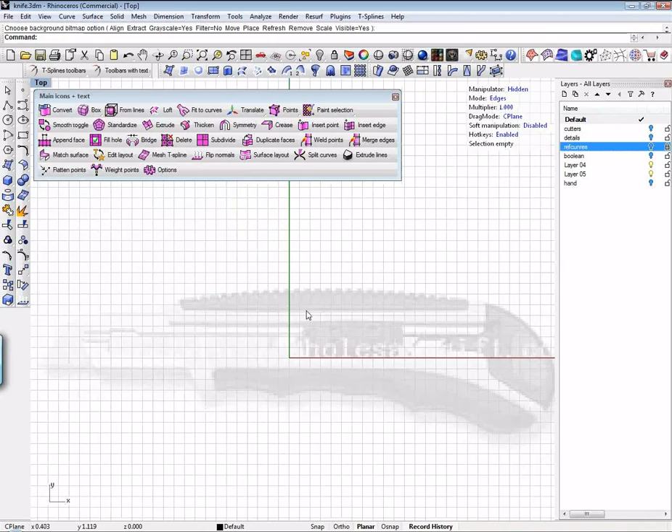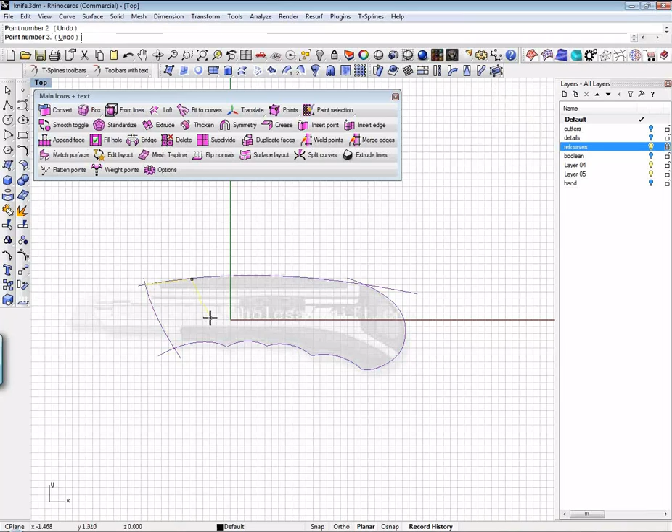So I downloaded this image of a utility knife off the web, and I built some reference curves. These are just basic Rhino reference curves, to give me a visual cue of what I want to build. The last couple of tools I want to show you is this append face tool.

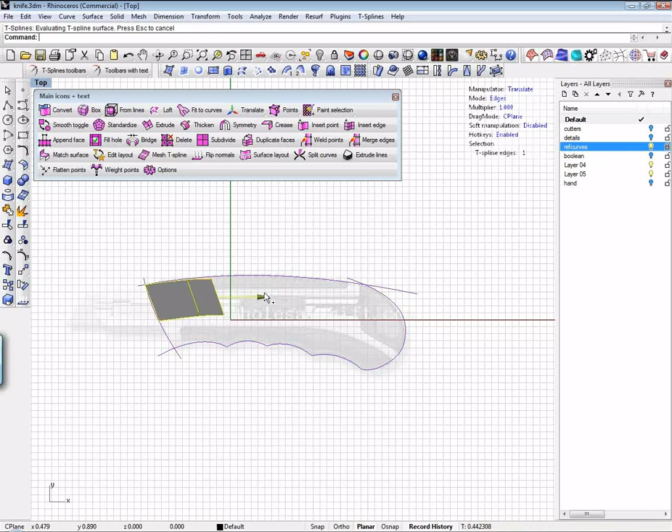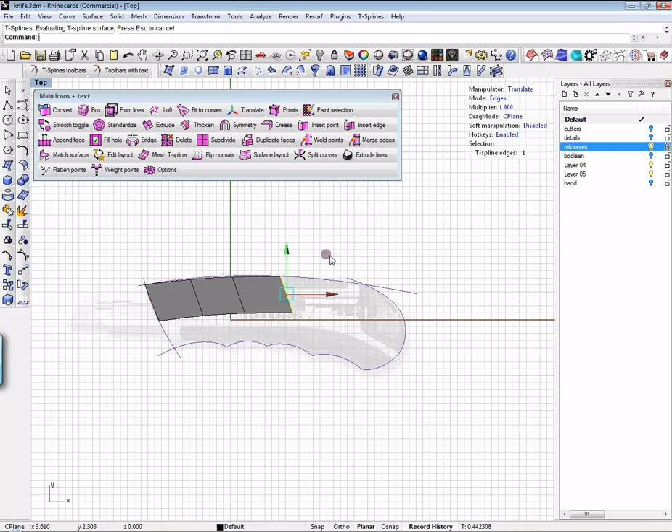What this allows you to do is make a four-sided single face. Pick three corners and right-click, and it'll make a face. Now, using that Alt-Drag workflow, I can set my mode to edges up here, pick this edge, bring up my translate manipulator, and Alt-Drag this edge out. If I want to use this disk, I can interactively drag it around, knowing that it's stuck to the C-plane, and start dragging this thing out.

Now notice I'm going to line up these things with my detail bits, and I'm not doing a very good job of that right now, but I'll go back to my verts mode and drag these around a little bit. Again, this is nothing complicated, just moving points around. Anybody who's worked in Illustrator or done any NURBS work will be okay with this.

I'm going to go a little bit past my endpoint here. Actually, I might add one more at the end of this. So I've got here, I'm going here, move this guy out of edge mode, move this guy out a little bit, go to my verts mode, straighten that out so it kind of flows nicely, how you'd expect that handle to flow.

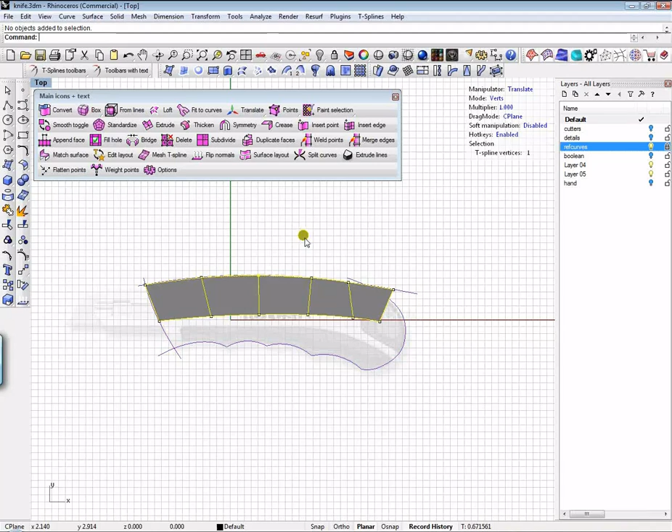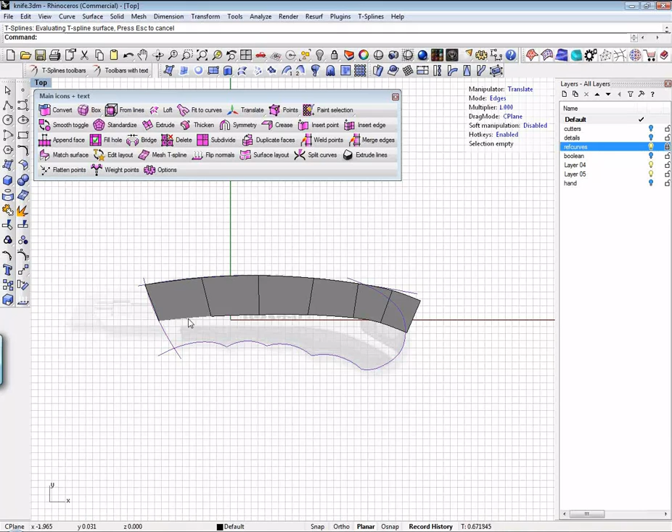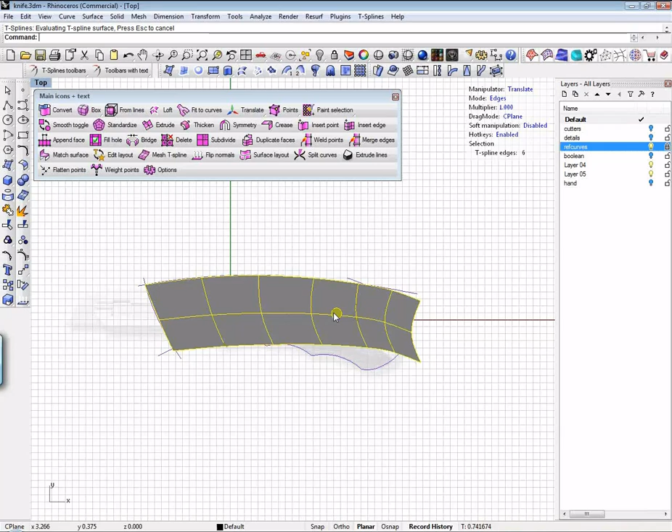Then I'm going to go to edge mode and pull out one more edge. So I've got one line here. There's going to be a little bit of curvature in this model, so I want a detail line going down the center. I'm going to grab this entire curve line by double-clicking the edge line, and then Alt-drag this whole thing down. I'm not being terribly particular about where this goes because I can always adjust it later. Let me turn the shading off so you can see what's going on here.

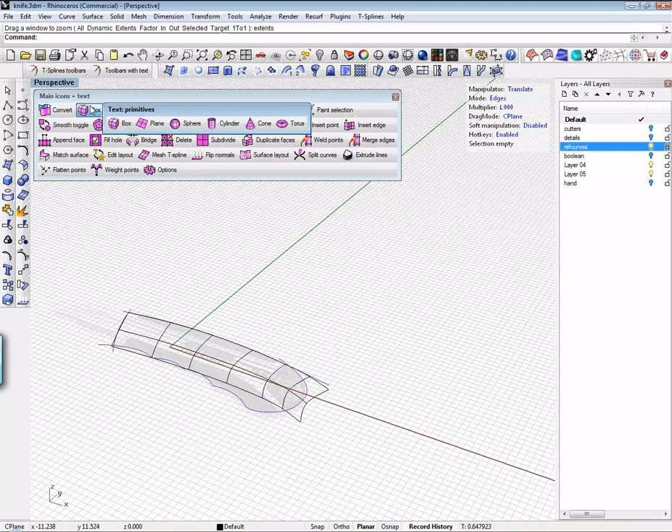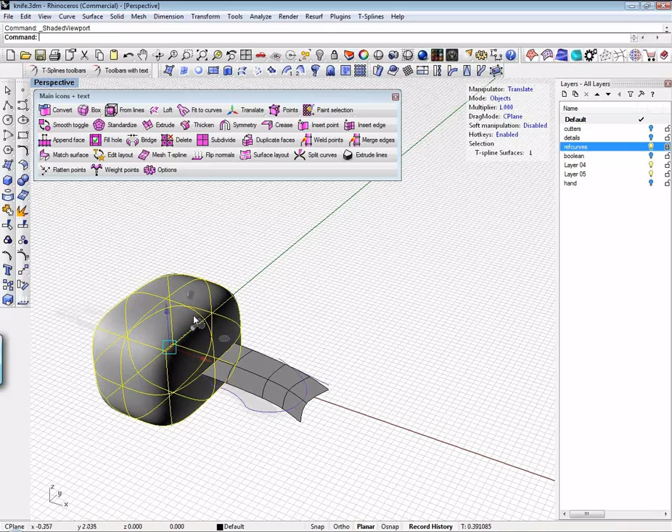Now you'll notice that I've got nice smooth lines here, and this would be a good time to talk about the difference between smooth mode and box mode. There's two ways that T-Splines objects are displayed. There's smooth mode, which is here. Okay, this is what the smooth T-Splines objects look like.

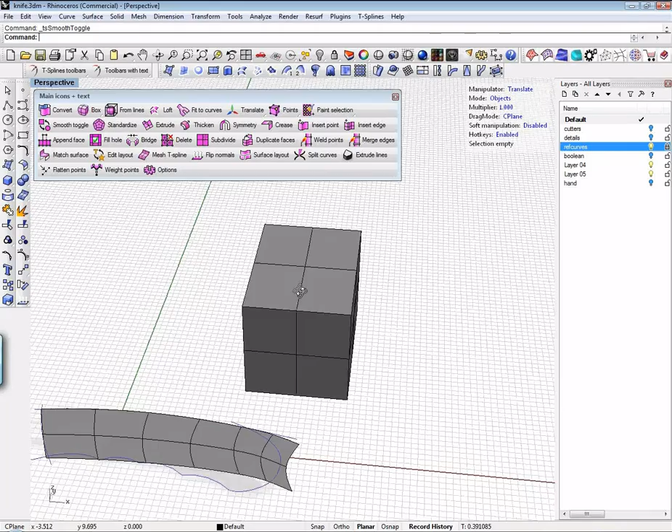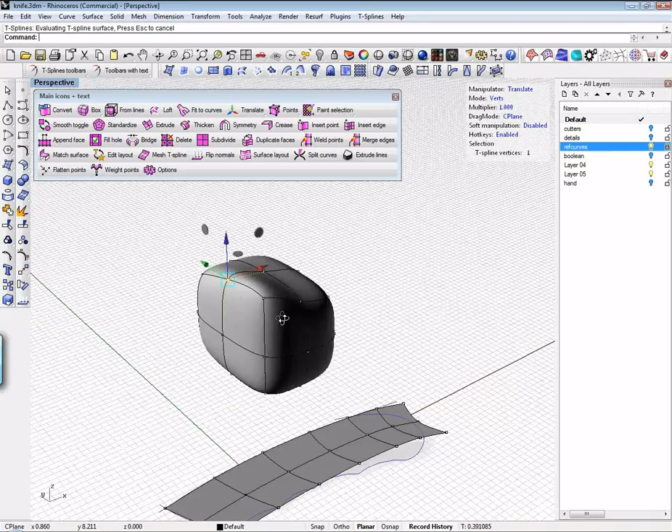And if I do smooth toggle up here, you'll see that it converts to box mode. This allows me to see what the polygonal control cage of this object is. The easiest way I can describe this is imagine that there's a smooth object trapped inside this box. And as I move objects on the box, when I convert back to smooth mode, it modifies my smooth object.

So in this case, let me get rid of this. I'm going to convert this to box mode because it's a little bit easier to lay out, and I'm just going to drag my points around so that they're laying out about where I want them to lay out.

And I've added an extra detail line here that I don't think I need. So I'm going to go to my edges, pick it, and delete it. You'll notice that it disappears. If I go back to my vert mode, I can then pull this around. And I've got a basic approximation of my knife.

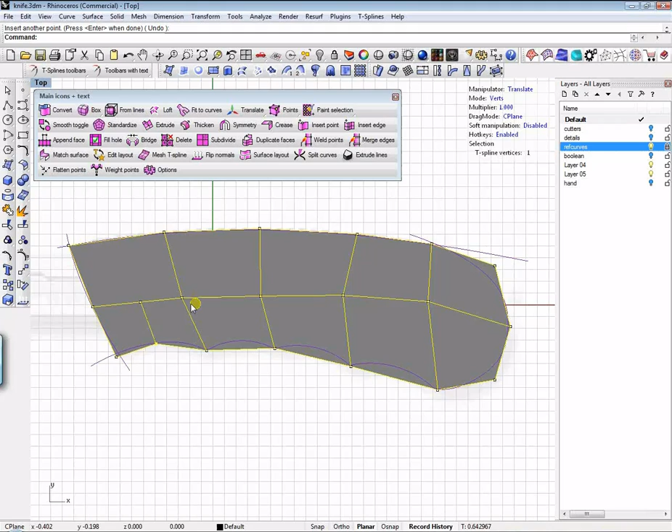I'm obviously missing the detail that I need for the handle grips here. So I'm going to go to my insertPoint command, click on this edge here, click on this edge here, right-click to accept. You'll notice, if I bring back my vert mode, I've now got some added detail, so I can bring that up. I'll do that for the rest of these - again, just clicking two points, right-clicking to accept. Go back to my vert mode, pick this, move it around.

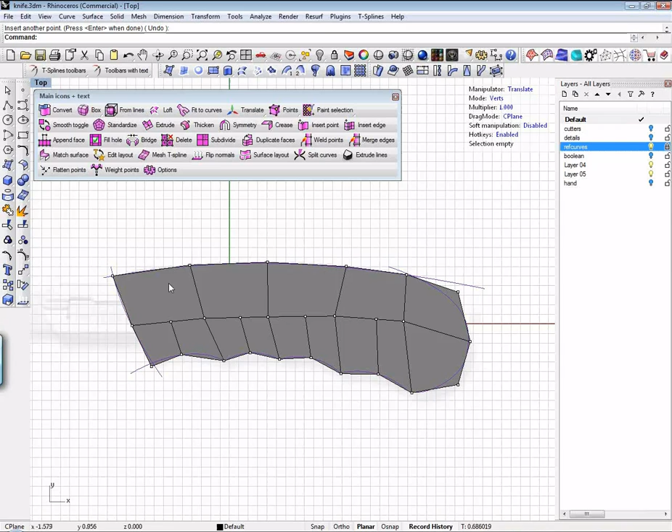And I've got the basic of what my knife should look like. I've got detail where I need it, no detail where I don't. This will all blend together really smoothly. If I go to the perspective window and let you take a look at it, you'll notice that this is just a dead flat plane.

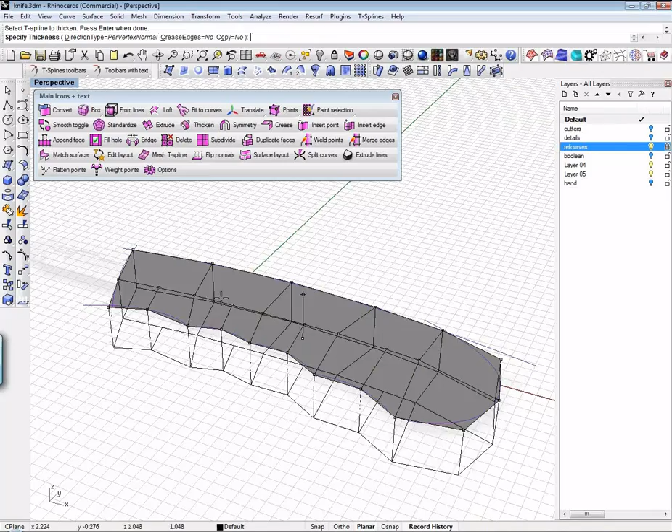So now what I need to do is give this some thickness, and there's a couple of ways I can do this. I can use the thicken tool. What that'll do is give me an enclosed volume, and I'll go ahead and do that so you can see it. Again, this is box mode. If I smooth toggle, it should convert and show you a nice, smooth, kind of riverstone shape.

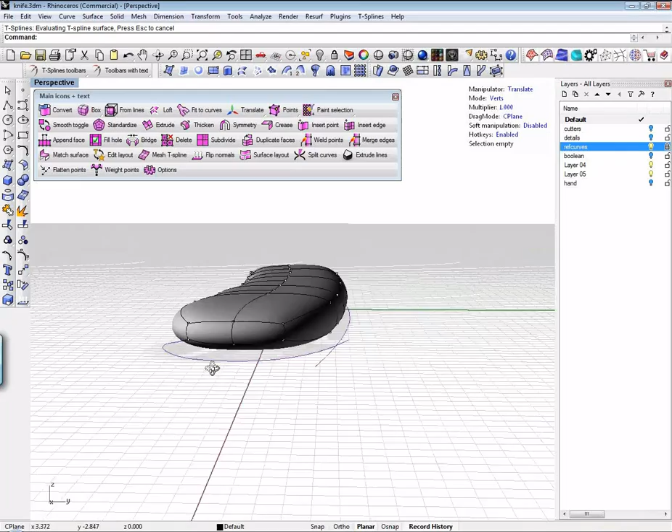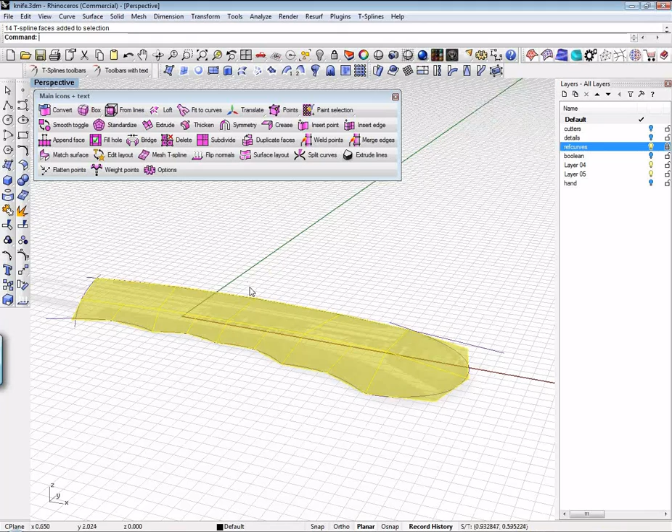Now the problem with this is I want this to actually be half of my knife. In this case, what it did was build the whole thing, and I don't really want that. So let me go back and unthicken that just by doing an undo. Instead, I'm going to go to face mode, select all of these, and I'm just going to alt-drag it to extrude or add some more surfaces.

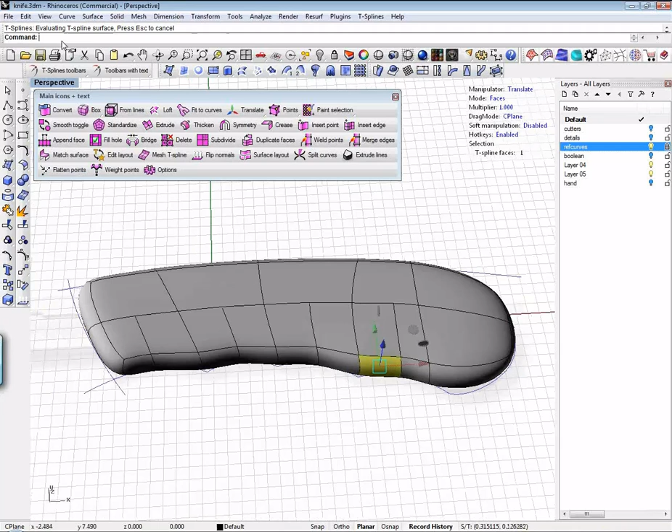Now what will happen is this will make an open surface, which is what I want. Now if I smooth toggle this, you'll see that I get half of my knife. If I go to the top view again, in smooth mode, you'll notice, if I unshade this, that I'm kind of close to what I wanted, but not really. So I'm going to go in edge mode, and I'm just going to drag these around until they get a little closer to what I want.

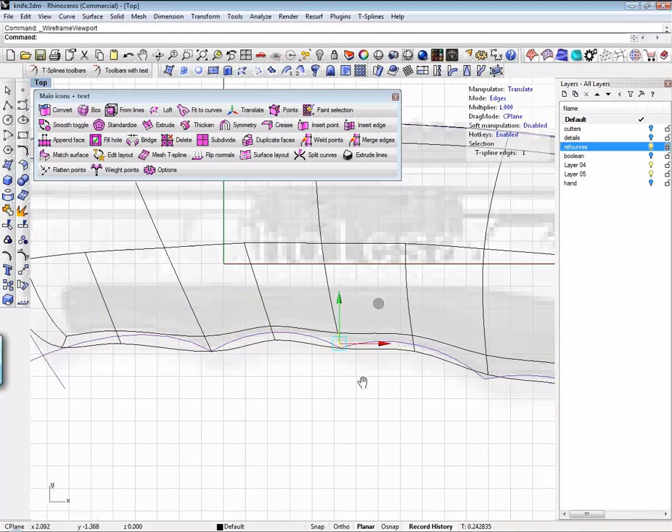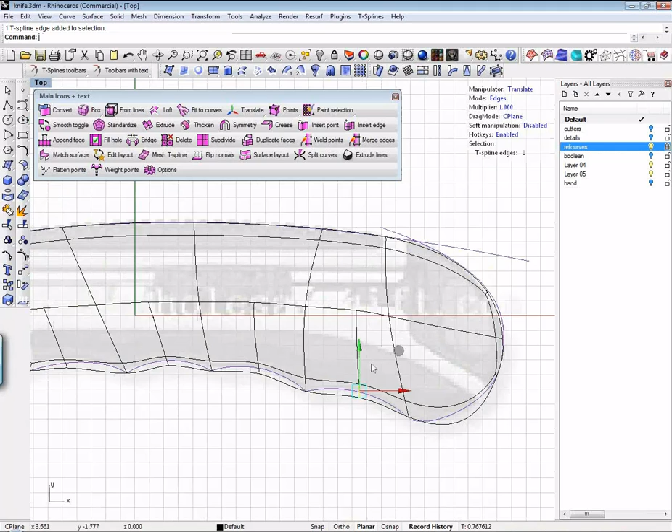And this is where the interactive designing on the fly part of this comes from, which is just really fantastically cool. Because I can make decisions about the model as it develops instead of worrying a whole lot about whether or not I'm hitting a sketch.

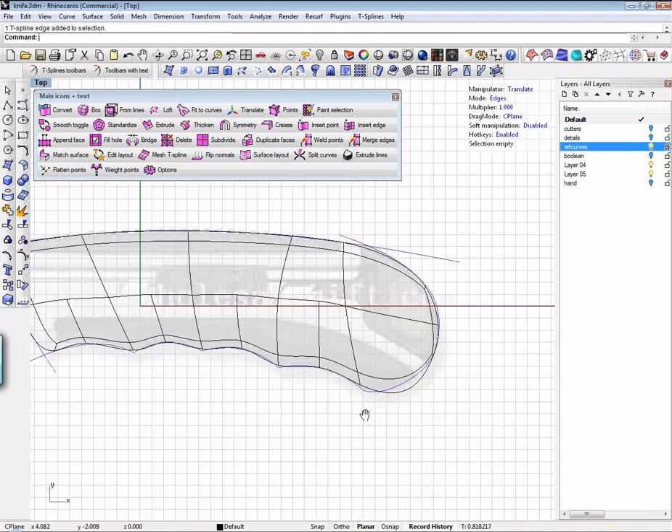Now, you'll notice that my handle's not quite as sharp as I was hoping it would be. So what I'm going to do is adjust some weight on these edges. I'm going to pick these two edges, and I'm going to run the tsWeight command, typing it into the command line, and hit enter. You'll notice that currently it's weighted at 1. Let me change that to 3. And you'll notice that that whole thing sharpens up.

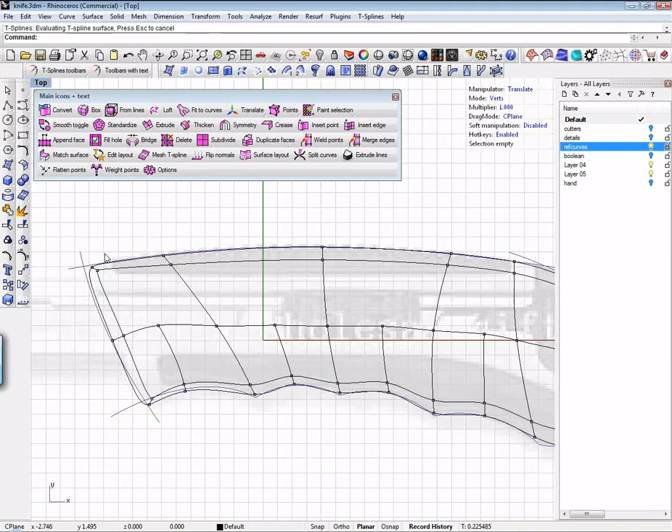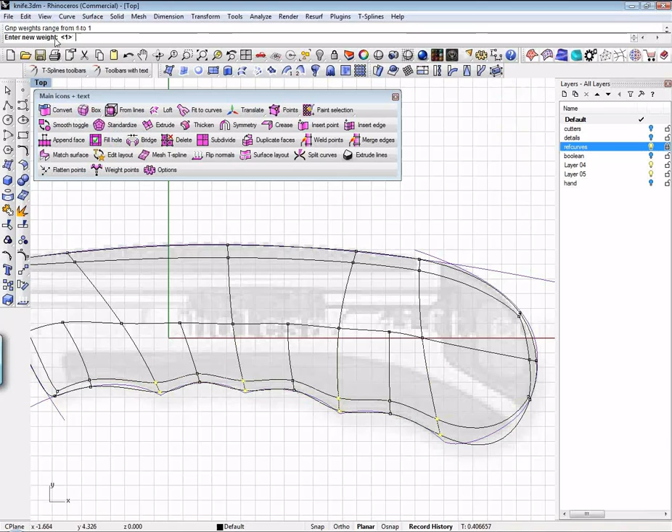Now I can go back into my edge mode, and I can get much closer to what I had originally wanted. Let me do that with these as well, because I want these to be a little pointier. I'll just run that command again, tsWeight, and change that to 3, and you notice that all of those sharpen up. Go back to my edge mode, I can move them all around a little bit, and then I can go back and fine-tune this, pushing and pulling until I'm happy with the shapes.

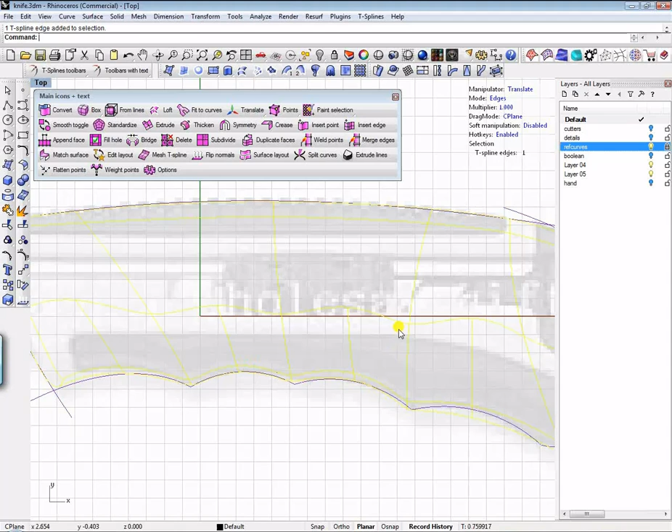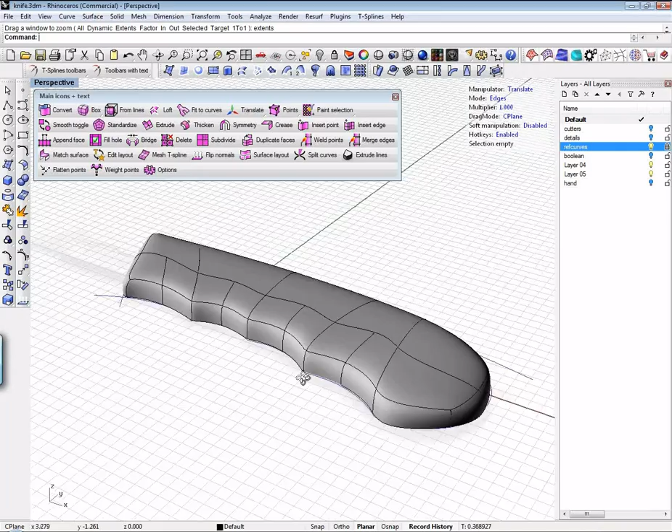Okay, so let me shade that. And you notice that we have a really nice transition, but I want to add a little bit more curvature to it. So I'm going to double click to select that whole line, but I don't want to modify the front and the back. So I'm going to control click that one, and control click that one.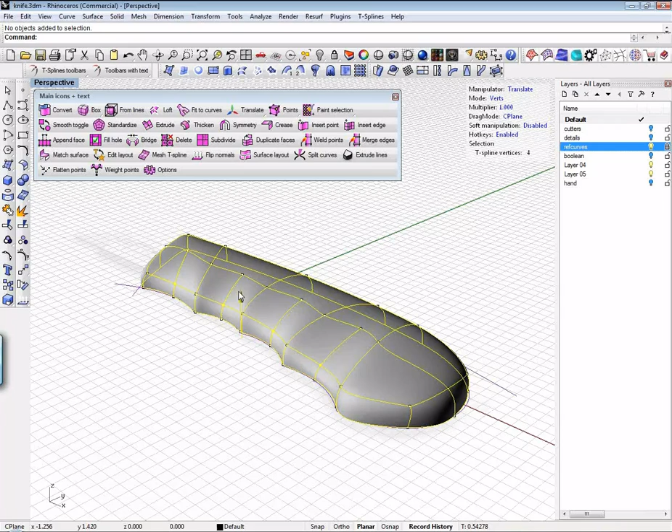And I'm going to pull this up a little bit just to give it some more curvature. And then maybe I want to go to vert mode up here. And I want to add a little bit more curvature into this handle, so I'm going to pick these 4, and I'll just pull these down, and then maybe I'll just pull these up. Make it a little more handle-tastic.

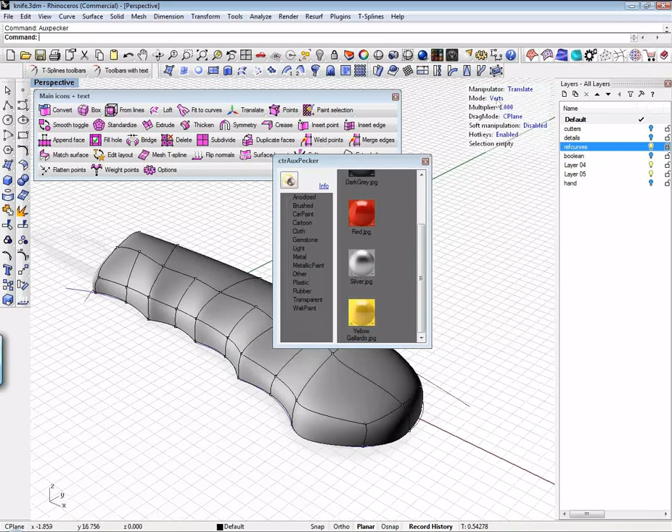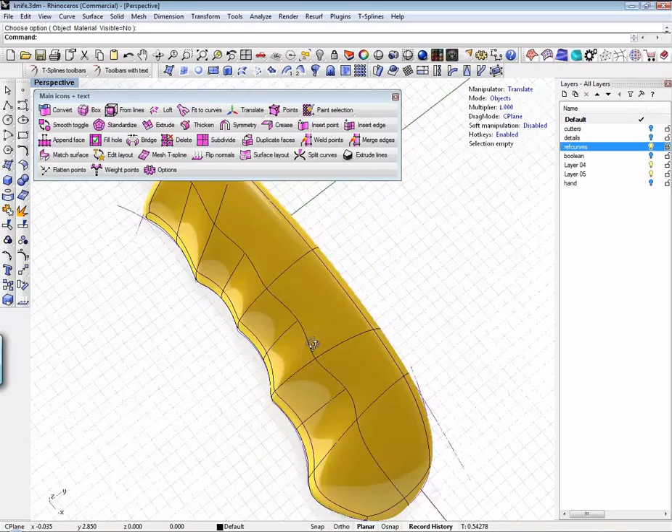Now the standard Rhino display is not quite as shiny as I would like, so I'm using a plugin called AuxPecker, and everybody always asks about this. Matt has information on this on the website, but it just makes it a little easier to see when you're doing this stuff. So let me make this shiny, and you can see how great these highlights and transitions are. See how that just bleeds out into a beautiful bone line and then just blends right into the handle there. And again, you may be able to do this in NURBS, but I doubt it. You're better than I am if you can.

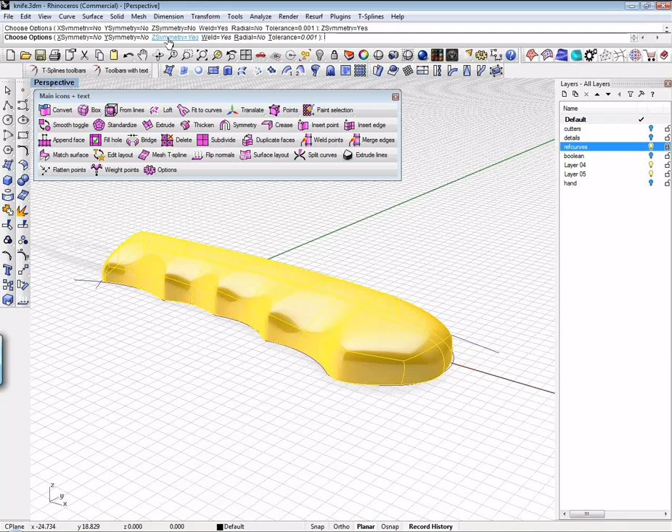So the final part of this would be to get the other half. Well, I'm going to use the symmetry command. I'm going to pick that, that's the fraction of the model that I want to do symmetry around. And then I have a couple of options up here. I'm going to use my Z symmetry, so I want my X and my Y to be off, and I'm going to say my Z is yes. Right-click to accept. I get my model.

My normals are turned inside out, so I'm going to flip my normals. And you'll notice now that I have a beautifully symmetrical, beautifully blended model that I can evaluate and say, well, I don't like how my handle's looking here because it's really, really square. So go into my vert mode again, and I'm going to start designing this thing on the fly now. Say, well, maybe those aren't the ones I want to move. Oops, put my normals back. Maybe these are the ones that I want to move.

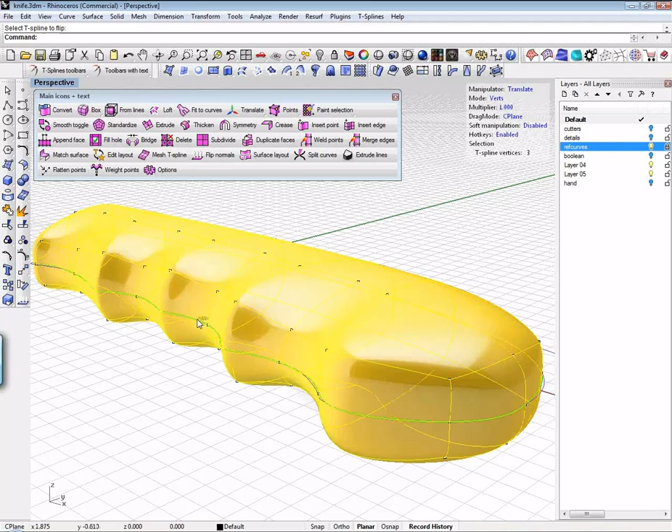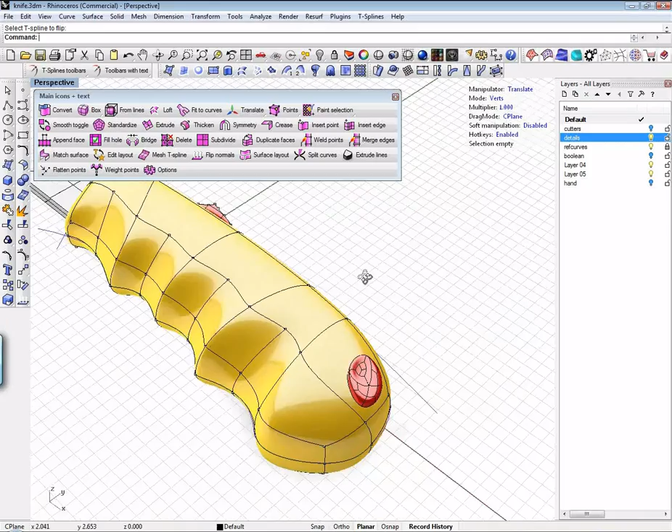You can see that I can just add some more curvature in there, and since symmetry's on, it follows through the whole model. Okay, so you need a really beautiful shape like that, and then, if I bring some details in, I have a little thumb screw and stuff like that, and a little button here that's smushed in.

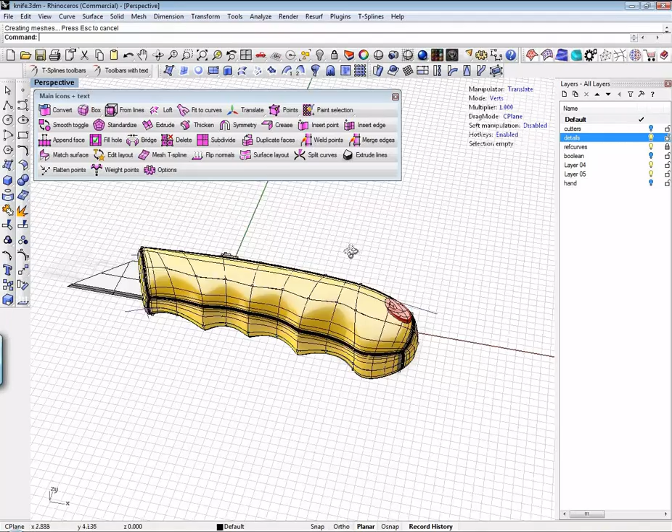At this point, you could convert this to a Rhino surface, which would be suitable for any type of downstream application, just by right-clicking on this convert button. If I right-click on this, it says select the T-spline surface to convert to a Rhino surface. I click this. This is now NURBS, you're right back into Rhino. This is a typical NURBS poly surface. You can Boolean this, you can trim it, you can cut it, you can do whatever you want with it.

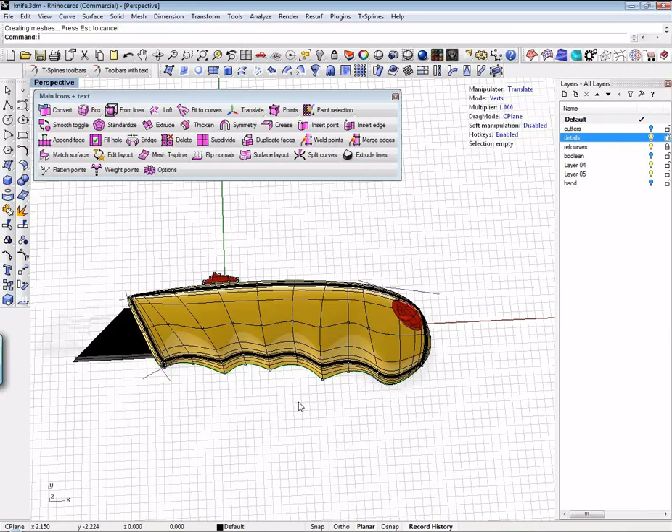And the fidelity on this data continues to amaze me. Every time I've done a T-Splines project and shipped it downstream, it has transferred beautifully into Pro-E, into SolidWorks. It offsets wonderfully, it does all sorts of fantastic stuff. So let me beat on that workflow just a little bit more. You can see how, again, I think we did 9 or 10 minutes to throw something like this together, and you have these fantastic transitions.